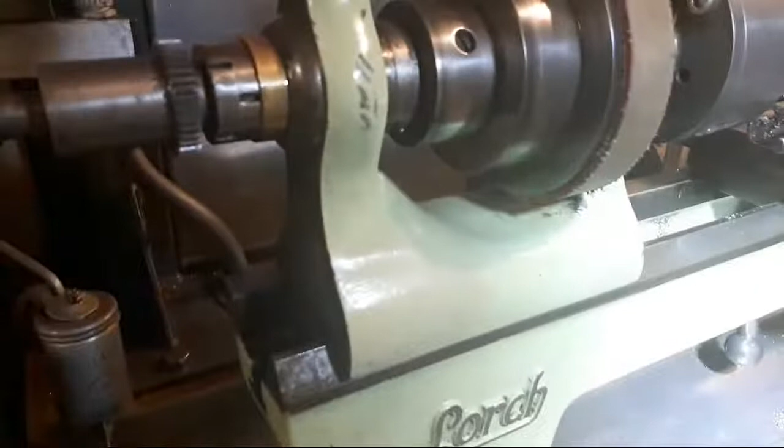Now I need to spend some time. Hey Alistair. I could make a threaded fixed tumbler, and I do need to, because I need to make a drill bush to locate the center of it, to drill for the pin for the detent. So I might have to do that, but it is an odd thread and I don't think I've got a die either, so, and at this point I haven't got thread cutting attachment.

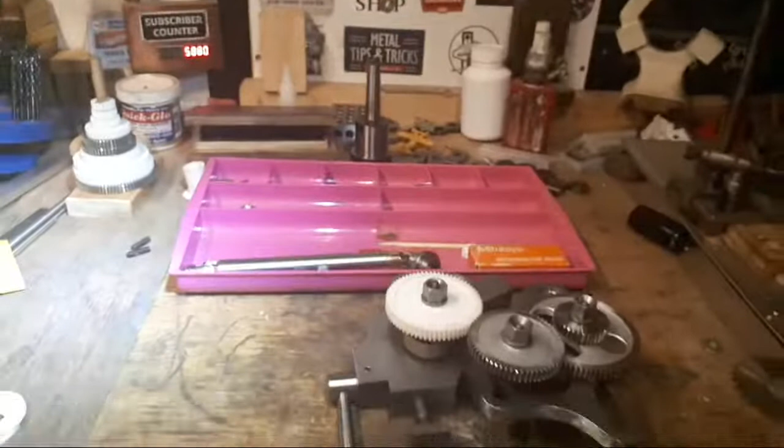Let's move past all this junk, and it is junk. Hotshot 360 oven there under that junk. It has been a little bit deceiving, has been used in the last 48 hours, but I've packed stuff back up on top of it so we can get the cone of cleanliness for the video. I need to spend some time on this gantry here at some point. G'day, Abe, good to see you.

I don't know, I'm waiting for inserts from China, but that's another story. And they haven't arrived, and they've been coming a lot longer than that, so it shouldn't be far away. You might have it by the end of the week, Rustnox, I hope. I really would like to see that.

Got to fix this gantry. We've got some, this is all 3D printed and it hasn't lasted, so some aluminium parts would be good. At the moment it's pretty rocky, it's getting worse gradually. So new bits, this is it. Quite a job.

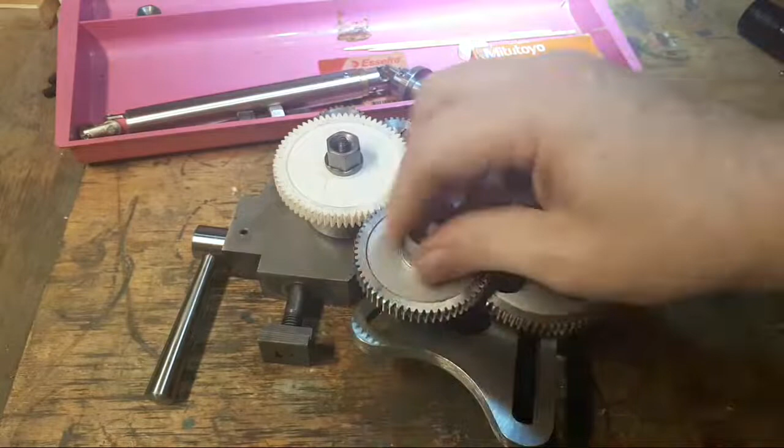These are only finger tight, and that's all they need to be. I'm really pleased with this design. I'm kind of wishing that I'd put...

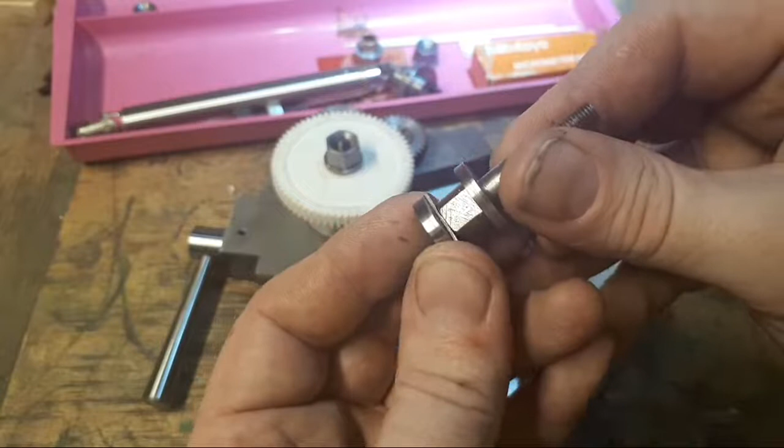These have T-nuts on here so they don't turn when you do them up, and this one has a T-nut on there so it doesn't spin, and they pinch by about 1 millimeter there, something like that. So this is a really good system. I wish I'd put hand nuts on these.

And this all runs on a bronze bush. And these done up. There's a lot of work in these nuts, Craig. I'm not sure I want to make some more, but we'll see how we go with that. Might happen one day. A couple of nice 25mm thumb wheels would have been really good for it.

Probably, Craig, I've got a dividing head so I can cut all these. The plastic ones will be all right for a bit, but I can either cut them or I can buy them and trim them down. I haven't decided which one yet.

So this one here, this is too long, this thread. I'm going to shorten this up. I think it's a pain in the...

So this one runs the same speed as the spindle, and then the gears are from there through here.

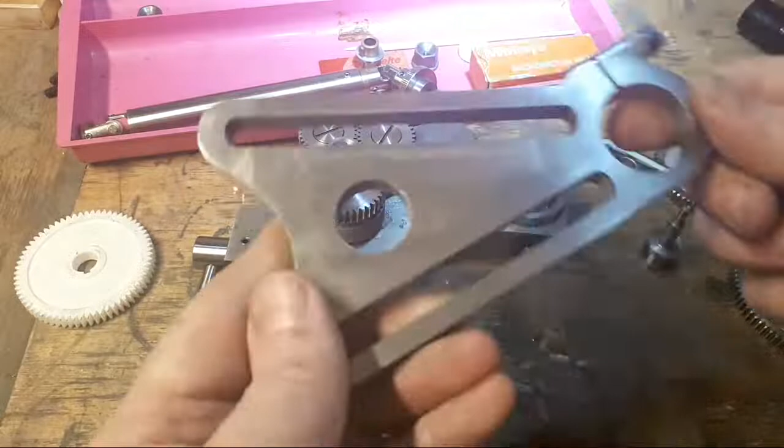I don't like this bolt much. That's the banjo. I'm really quite pleased with that. This is going to get a proper lever bolt, I think. I was thinking I might buy one, but they're all too big in the body and a bit ugly. You can buy a plastic one, and if I'd made plastic ones for all the others, I probably should have done that. But I'm probably going to make a bolt and then machine a washer so it locks in the right spot. I think that's the idea.

So, hey Ted. You're probably right, you're probably right, Stephen, but I think that it's going to be fine. Hey Fridge. G'day Scott.

So that's one project to do. This here, if we have a look, has a bush in here with a bronze bush in it. This is recessed so that this piece, which is going to look something like this, I think, with a key in it, sticking out here, sits down inside there and doesn't collect too much dirt and dust ingress. That's the theory there.

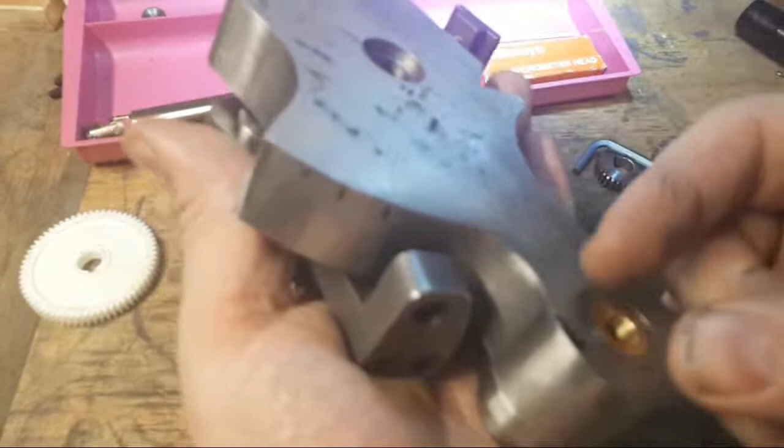And it goes through here, and I'm just going to put a shaft collar on here, a good one, and a grub screw or a side screw to do it up, and that'll do to lock the sideways end. The end ways, I guess end shake you'd call it.

There's still things to do here to connect it to the universal. Still got to think about that. This is in here just with a grub screw in the bottom, 8mm grub screw, which I think is going to be good enough.

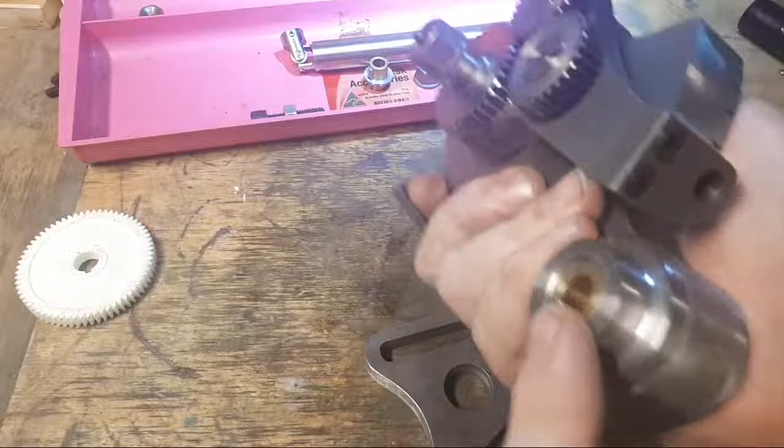And I need to make this lubricatable because it's not. I need to make it so I can oil it because it's a bronze bush. So I don't know whether I put, just looking at it, it might be best to drill this and put like a nice 6mm oil nipple in the top here and put a groove through the bush to lubricate it. That might be the nice way to do it.

I'm not even sure it needs a groove. I'm sure the oil gun will push it side to side in my sort of fits, the sort of fits that I make. So that's probably going to be the easy way to do it. You just oil that rather than put an oil hole here and locate this positively. I'm probably going to just drill this and put an oil nipple in the side, and that way it's easy and easy to fix.

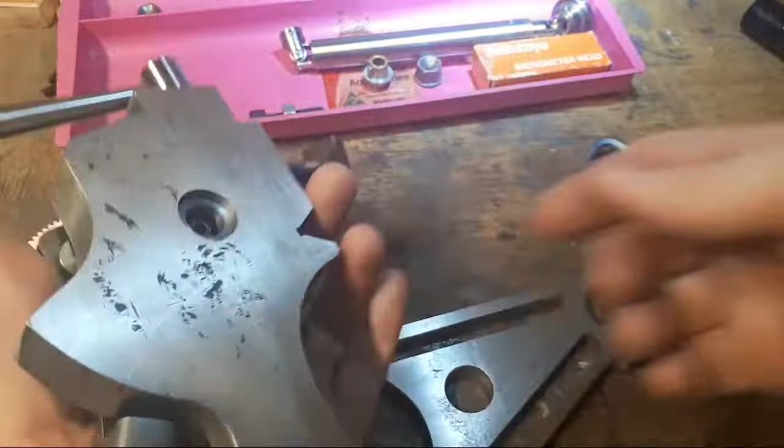Yeah, the helicopter's back. If anyone's PTSD kicks in, yeah, sorry.

This hasn't cleaned up particularly well on the back, probably because it's been sitting around in a puddle somewhere. I might have a bit more of a go at it and see if I can clean this up. I could send it to get ground - I've got someone who offered to do that, but it doesn't need to be that good on that side. This side has cleaned up pretty good.

Hey JB, miss all the good bits.

So that's where we're at with this. It's the state of play. There's a lot of bits in it and it's coming together pretty good.

Like the Battle of Britain - yeah, they're out looking for someone, I think. It's either a police helicopter or it's a search and rescue helicopter, I reckon. They're fairly low and they've been going backwards and forwards for a little while.

So I've got drive right to this shaft, which is the PTO shaft through to the compound, Craig says. Making this shaft is fairly simple when I've got some carbide to cut it out of some decent shaft. That's going to have a piece sticking out of it that looks something like this, only in steel, with a nut on the top, like so. And that should clamp those two down on there and drive from the banjo right through. So that's the theory.

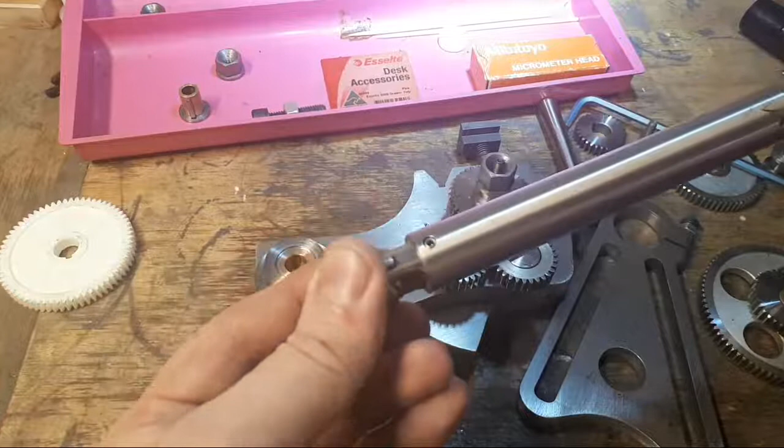89 Magna, eh? Awesome. The only one, the last one I saw was at the Motor Museum in South Australia. What an incredible car. There's a reason there's not many of them around. Anyway, they weren't perfect from the factory, Craig, sorry.

Yeah, it doesn't need to be phased. It's not far out there now. I don't think it's going to be too bad. If it's a problem, I'll move one of them. But at this point, I think it's going to be okay.

Terrible car, sorry. Gosh. From the man, yeah, probably. Anyway.

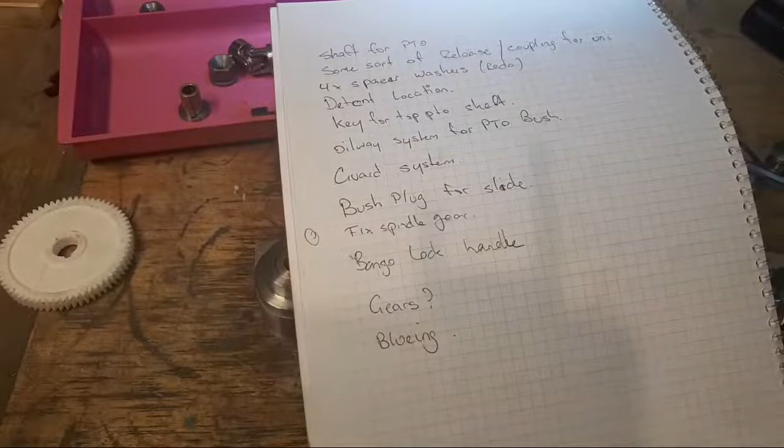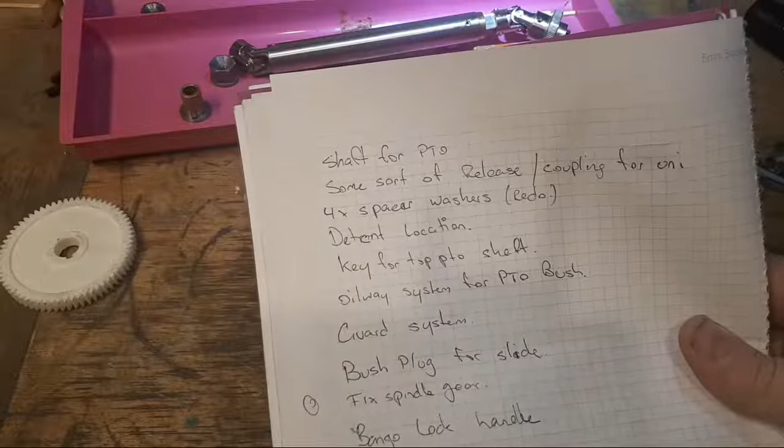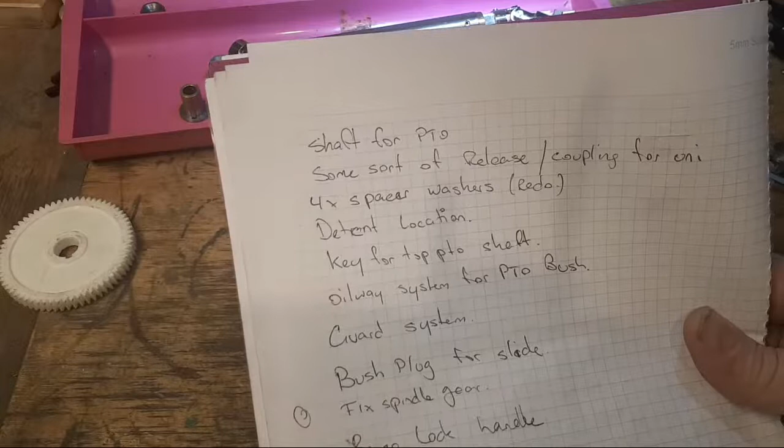No one likes Mitsubishi Magnas. Mitsubishi Magna was Australia's first Mitsubishi car after Chrysler got out. I guess someone else will know the history better than me - probably Craig - but it was a pretty terrible sedan. Either love them or hate them, and obviously Craig loves them, and we won't judge him for that much. Anyway. Upgrade of the Sigma, I guess. Yeah, I don't know if it was even that good. The Sigma had high and low range, so it was really only a farm tractor anyway.

I've got to make a shaft for the PTO, which goes through this hole here. I've still got to make some spacer washers because when I put these on and started using them, I discovered that they're a lot thinner on one side than the other. I don't know if you can see that, but it's really not particularly good. You can see that, I reckon. So I'm going to make them and harden them up and get a friend to grind them flat. So that's where I'm at.

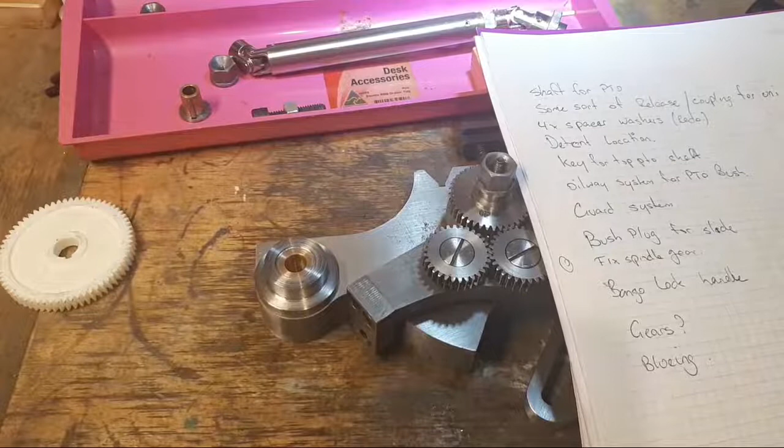I've got to organise this detent location here. So basically I've got to make a bush and center punch these and drill them, or make a drill guide - a bush with a hole so that I can drill them through this rod and get it somewhere near in the right direction, in the right spots. I've got to put an oil hole in here, and I've got to make a key to go in the end of the bush.

What else? I've got to fix the spindle gear because I had to move it, since this is a different thickness than what the original drawing was when I started. So I've got to put a spacer or a scotch key or something in there. I've got to make a lock handle for here.

This cap screw's a bit of a pain because it's just going to fill up with swarf, and you're going to have to be digging it out with a magnet and a scriber every time you want to use it. I don't like them much anyway - it doesn't look good on this machine, so I'm probably going to put a handle on that. Going to make the rest of these gears, finish this off, and blue the body.

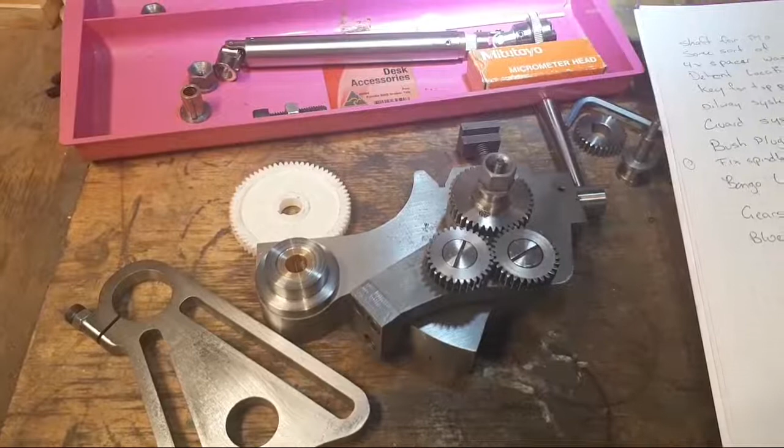So I've also got to make some - I've got to fix the compound. Now we're going back over the lathe. Sorry guys, if we can do it without derailing this stupid thing.

I came home tonight and cleaned up. Sort of. Wasn't a particularly huge effort, but I did sort of sweep the lathe down.

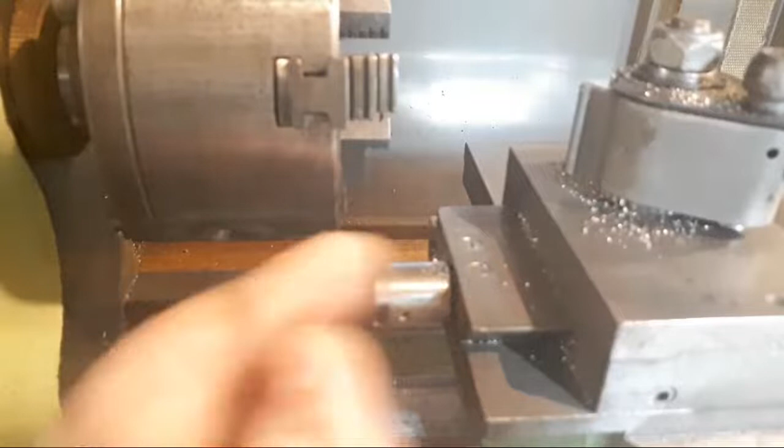You've probably all seen this and you know how it all pops together. I want to make this so that you take this screw out and put a plain plug in here on the end of the shaft to support it, to keep the dust out basically. It probably doesn't need to be anything special because there's no actual loading on that as such when it's just got a pin in it, because the loading's all between - I think the loading's probably between this end, which has needle rollers in it, or thrust bearings, angular contact ball bearings I think, and this nut.

You do, however, lose 3/4 of an inch or something on the end here, which I don't like very much. You lose more than that because this will only come up to there, whereas this at the moment will come 1/4 of an inch past. So I don't like that much. But if it happens, we might need to make something on here eventually with the drive out further here.

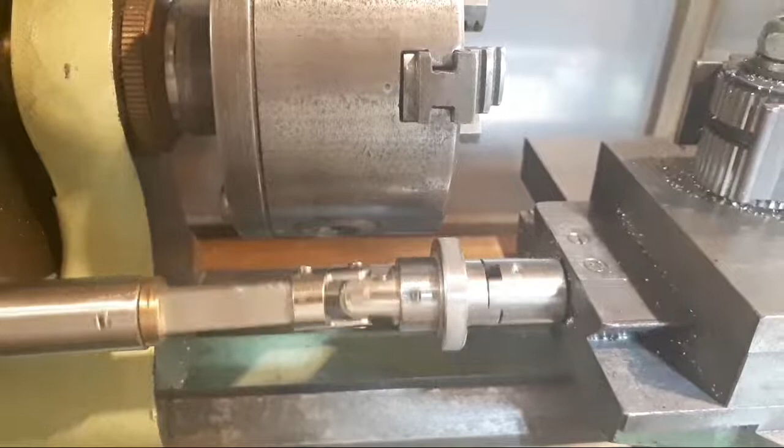Also want to put - now, because of the way this works, it's got a dog clutch here. I haven't really had much to do except think about this for a while. But when you pop this out, it's got 2 grooves in that pin, see? And this one's got a spring detent ball. So when that's in, that's not going to move anywhere, and when we turn it, it all turns like that. When this pops off like that, this freewheels.

Is everybody happy, as Mr. Pete says? Does that make sense? So that's how that works.

Now it's a very simple job to put some sort of a lever on this side, on here. If anyone can actually see that, I'm going to try and move this carefully. There. Try and put some sort of an adjustable micrometer rod that goes on here, a square rod with a nut on it or something, I'm not sure yet, to kick this off when it gets to the end of the stroke and kick the power feed out if you need it.

Craig, I'm sorry. I feel bad now.

So is it ball and socket? It's got a spring and a ball in there, like a proper screw-in detent. It's all one piece. So when that pops out, this works without it. So it theoretically means that all this can stay in place all the time if it needs to.

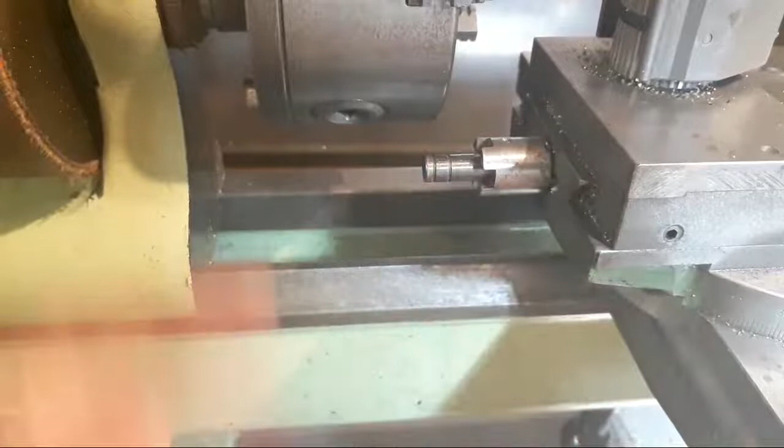However, if we want to take this off, say we want to use the 4-jaw chuck, or we've got a big job that we want to swing and get in close to the chuck with, we're going to take this out, which is a matter of removing this pin, and then there's a screw down into the end and a cross pin on the lead screw.

So we need to be able to take that out, and I'm going to make another piece to go in there with a screw on the end of it. It's just to blank that off to keep the dirt out of it, and that'll give us a fair bit more difference. So for that end, that's cool.

Now for this end, right, this goes up here on the shaft.

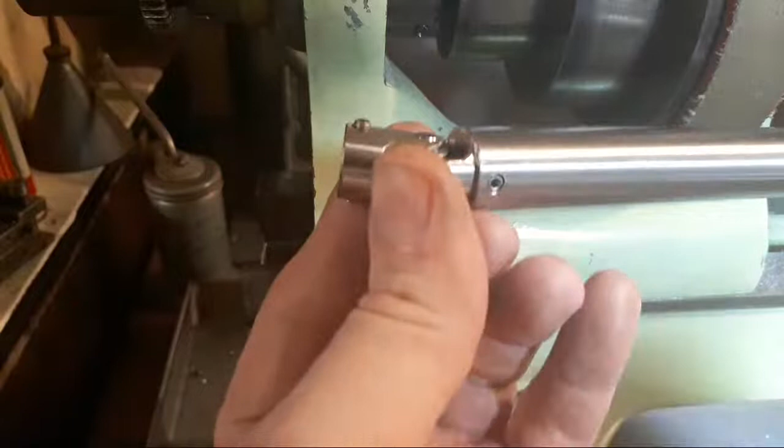Morris Minor, hey? Golden age of cardboard interior and clip-on tail light lenses. It's crazy because the roof always leaked and the glove box always sagged. But the lights didn't fill up with water because they would just clip on and they rattled. Anyway, my first car was an Austin 1800 Ute, so I know a little bit about that. But it's a long time ago. It's put me off cars forever.

Anyway, on this end, we could just have the shaft sticking out with the collar on it, which is the same diameter as that, and do up the 2 grub screws. But it's not a very positive lock.

Not at all really, not a big fan of it, because this can slip and you're going to get it out of sync when you're cutting threads and all that sort of stuff. So I don't like it. So we could make an adapter with a keyway.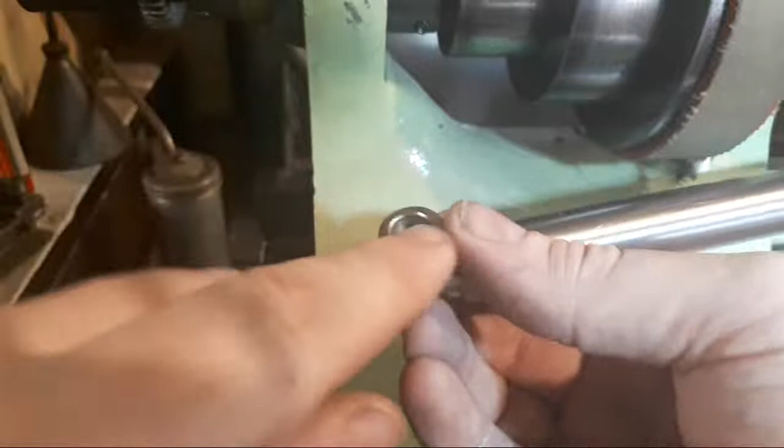Hey, Poppy. Joseph Lucas, Prince of Darkness. And then they got a bit later on and they put the plug hole of despair on the back of them. That was a bit interesting too.

It did, sorry. Anyway.

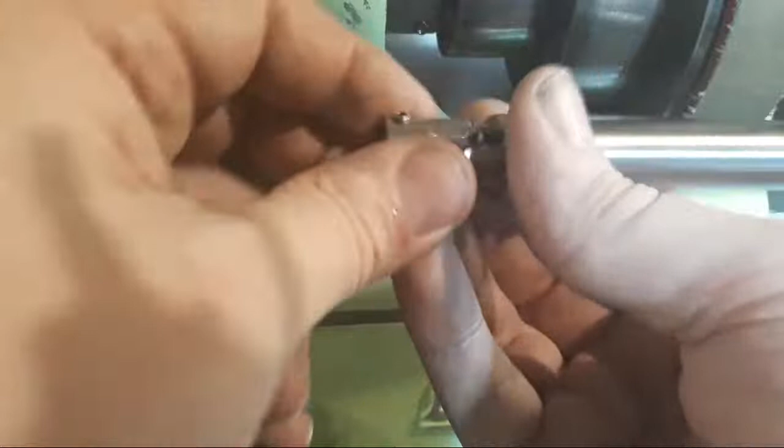I'm just getting started here. I need some way of making this positive, and also so that you can back a pin out or something like that. Maybe that's the answer, is just put a pin a little bit deeper that locates nice and positive, so that you can pull this off and put it back in the box.

G'day, making sense. Good to see you.

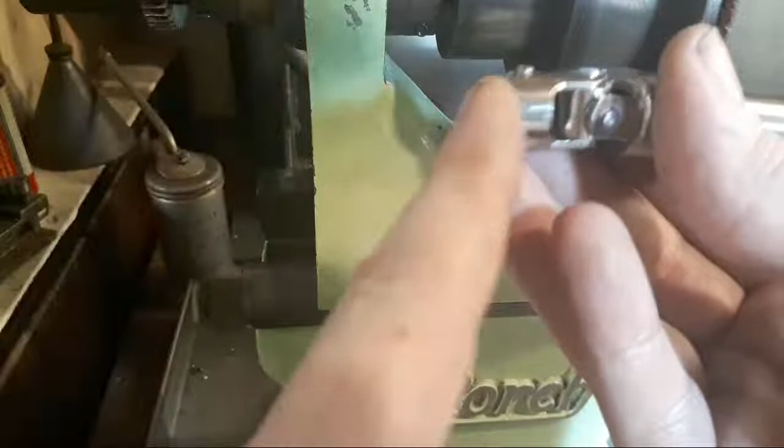So yeah, I want to take this off, but I want to put this back on in the same spot every time, and I don't want to be messing around with these 2 little 3-4 mil grub screws to locate it up and to chew up the end of the shaft when I take it off, and when I don't quite put it on in the right position again. So I need to make some sort of an adapter on this end to go.

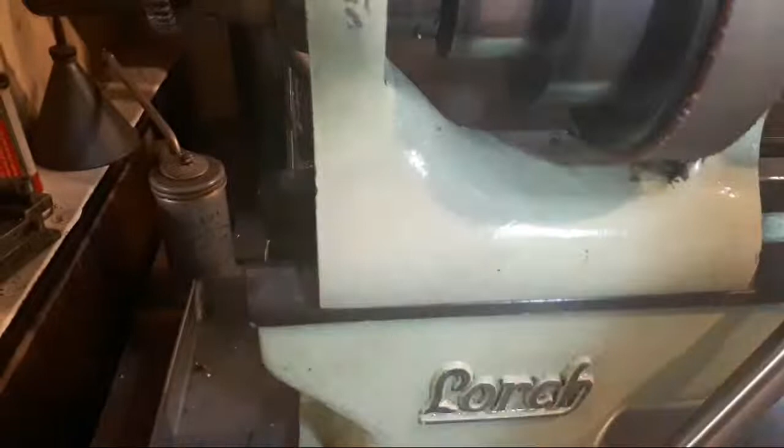Stephen. No, it's not a car chat. Sorry, Russ Knox. We're getting sidetracked, but everyone needs to be sidetracked this week.

So now, the pin could have a threaded head on it and just drill straight through, so that you push the pin in and then screw it in tight. That's probably going to work nicely, actually.

Single D shaft, like on a steering shaft. Raymond, I would like some more information on that.

Can you use one of those brackets at the built-in bearing assembly and then have a shaft off that?

I could, yes. The trouble is with that is that my lock dog clutches are only going to work one way, so I'm always going to get it the wrong way around. That's a fair point though. That's something to think about. That might actually work.

That's something I hadn't thought about.

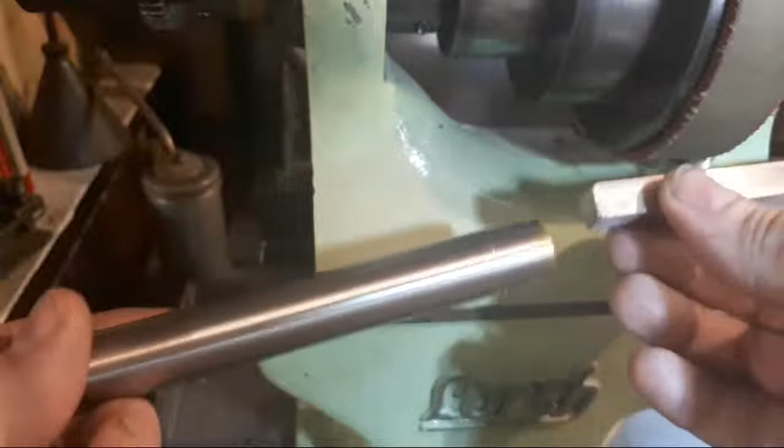I don't want to lose too much headspace here because I'm going to have to shorten this up anyway because at this point it's just a fraction long. I've already taken probably half an inch or an inch off it since I started putting it back together. But it could easily be, we could shorten the tube up a bit and we've got to take a little bit more off here.

And I want to put probably one of those spring detent balls in there that Stephen Lang got me so that you can click this together and take it apart, but it doesn't fall apart when you flip one end off and it lands on the dirt. That's the problem.

Rust and Ox, that's the correct and intelligent answer. It's a blue one, good colour. Any more knowledge than that's dangerous, and will probably get you a hard time here.

I don't know if this is a good idea or not, this square drive. At this point, it was the easiest and quickest way to make this, and it works. Hopefully it won't be too rattly.

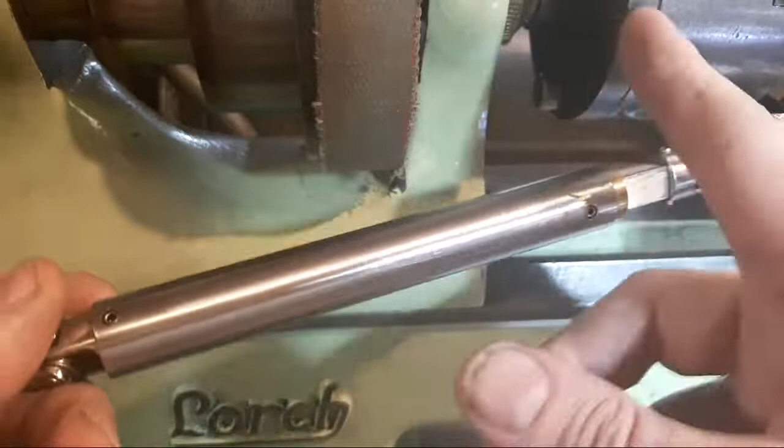The reason I haven't synchronized or phased these yet is because I believe this is going to be shortened - one of these will come off and be re-drilled back probably an inch. At this point I'd like to get this a little closer to the spindle, because if we're running collets, our work's back up here rather than out here, if that makes any sense, because when we put this 3-jaw chuck on, we're way out there, which is why you need an extension. But when it's in close, you want this tool right up here against the spindle, because that's where the end of the collet is. So to my mind, it still wants an inch off here. A spline would be better, and I'll see when this wears out.

This in and out of sync phasing thing, I really don't know about that, I don't know very much about it. Everyone seems to tell me something a little differently. These aren't quite lined up, so I don't think it's going to go whoop whoop whoop whoop whoop. But I don't really understand - I think they've got to be half a turn out. If these are lined up, this one here and the other end's lined up, and these are lined up, then what you're going to find is you're going to get some of this, I think.

Anyway, there we go. So I'm thinking I'm going to put probably a bar with a thread on it and a flat side with some measurements on it, and probably a calibrated nut that I can spin on here to move this piece in and out so that this pops off in the right position. That's the theory. Max had a really good idea about

So there's still a crap load of jobs to do, like there really is. It's nowhere near the end of the tunnel yet, unfortunately. Try not to knock this off here. Sorry about the mess, it's been a pretty productive weekend - I've made a few of these bits this weekend.

Yeah, the other thing that I want to think about now - this is kind of a bit of a death trap, to be honest. If we put this on here, and do that up, what, quarter of a turn or whatever it needs, right?

And put this back on here, with the biggest gear we've got, and then this nut on here, like such. That's nice and secure there like that. We've got these gears sticking out here in the way. Now you've got to put your hand around this way to get your finger caught in between them, but if you did, I imagine it may not end well. That's where I'm at with it.

I'd like to make some sort of a guard system for this. That's the theory. Now whether I put 2 pins in here and a guard that sits over the top with a cover on it that basically goes over the top with a nut on it - I don't like that very much because they always come loose.

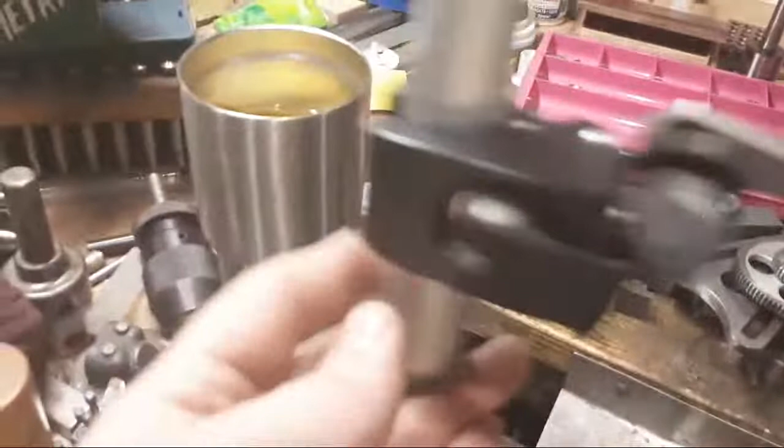So we've got basically a bike GoPro mount on a tube and a rod and a 3D printed camera phone mount. On my Thingiverse, if anyone wants it, this is the best part of the whole setup.

We've got aluminium tube up here, and we've got this crappy ball mount, which is only held in place by one grub screw. This moves backwards and forwards, but the 3D print here that holds it in place cracked. I don't know if you can see that. Let's try and focus it. Yeah, there we go. That's cracked, so that needs replacing.

This comes unscrewed anyway, so this whole piece needs replacing and screwing in the end of a tube with a decent adapter, and that would fix most of the problem here. That's where the camera issue is.

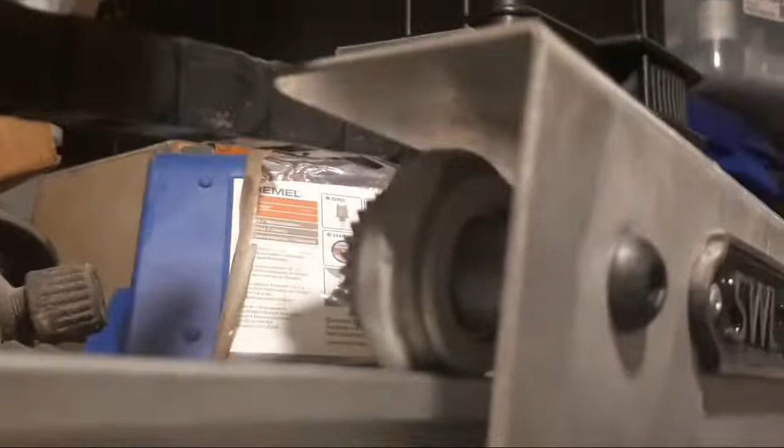Now these 3D printed wheels that run across this rail, got a lot of crap up here - this is storage area, sorry, this is a scroll saw, Pelican boxes, all sorts of stuff up here. Anyway, this wheel here has hit a rock or something and it's had the piece broken out of the side of it. These are no longer a press fit on the bearings.

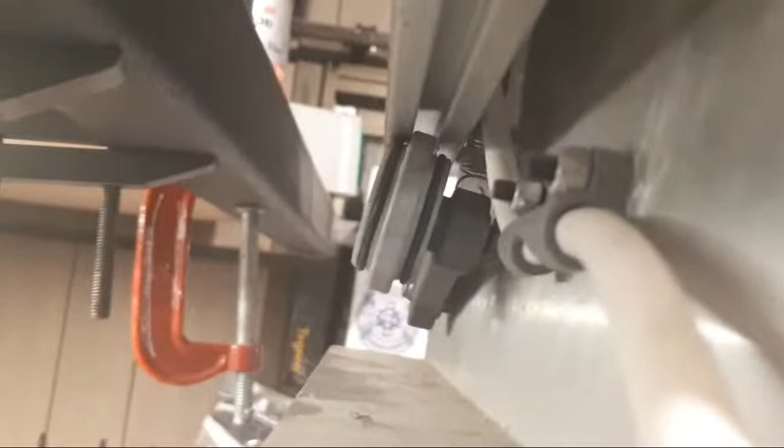So I'm going to have to make these wheels out of something decent or reprint them. This just has a spring-loaded arm in here to follow along the bottom one there, but that's no longer working on the bearings either. So at some point that needs fixing as well.

This bracket on the front, the 3D print, is probably pretty solid, and the light bracket's up there too. And of course we've got builder's plates on there because we can. So this is just a sheet of aluminium folded up to go over this piece of 80/20 rail. And this is the problem - when I fix all this here, which is a bit of an issue, needs some work as well. So there's probably a day's work making up bits for it and we'd be back in business. I need to do that at some point very soon.

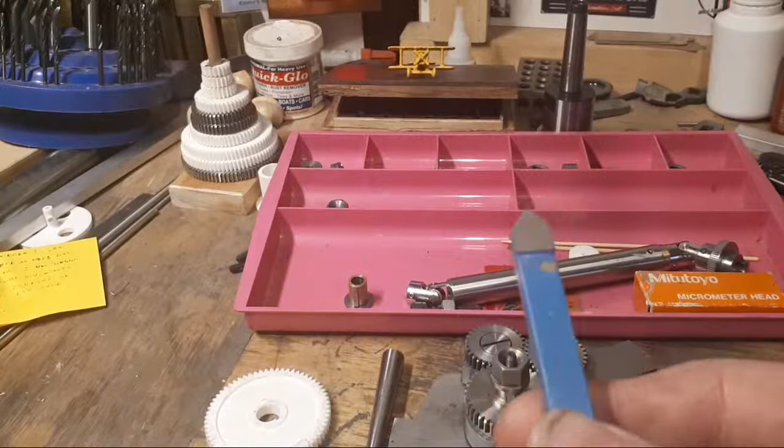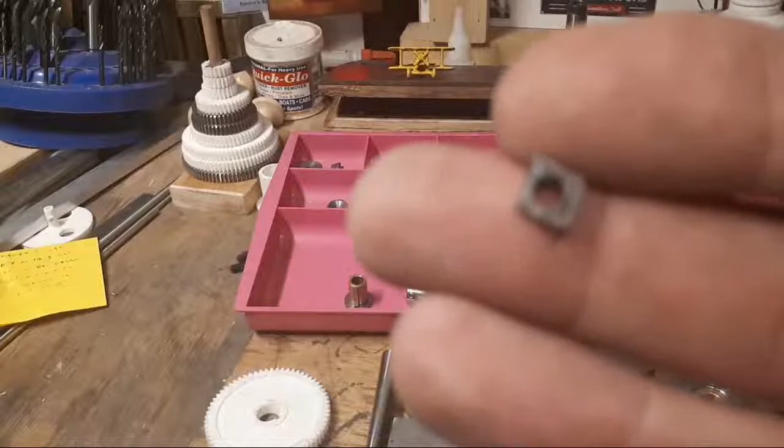Yeah, so we can't talk about that. What else? I'm waiting for inserts. I've got a set that Tinker sent, which are awesome, but they don't have chip breakers on them and no rake or anything, and I'm really not getting on particularly well with them at some point. I'm waiting on these, which is CCMT 6x2mm - they're the ones that I need. They've left China, and they might be here by the end of the week, I hope, or they might not. It might be another week, but it'll give me an excuse to make some other bits.

Dale's too much of a man, JB, for me to even imagine what that would be like, but just, yeah, go with it. See him in a cowboy hat and it's all over, Red Rover.

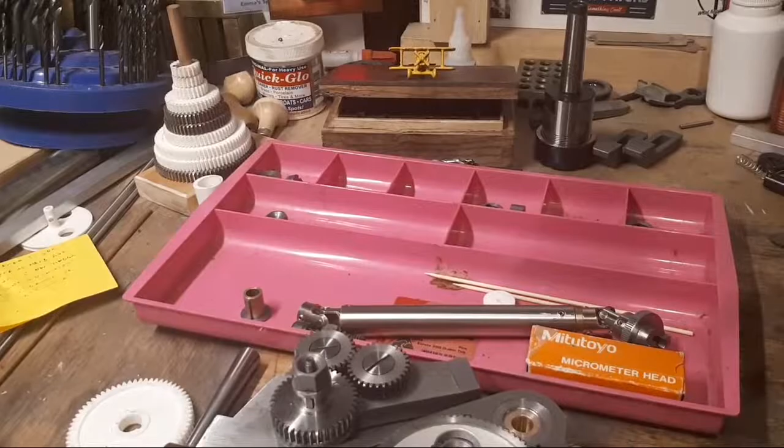What else? Mill hold downs - an update on those. I did run them through the tumble machine when I did these bits. So these look really amazing. There we go.

My friend who's got the bluing set up is in another suburb, and I'm not sure if I'm going to get to see him in the next 2 months, but I'll get some of these projects finished. We'll see how we go with that. There's hold downs to be made.

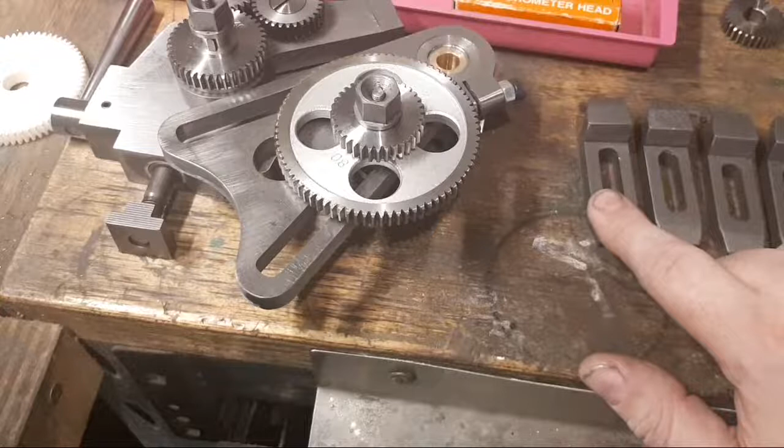I've got problems with milling machine arbors. It's in the milling machine, so I can't show you, but the 1-inch arbor needs some work. It's a Morse Taper 2 arbor with 1 inch, and I'd like to rebuild that, or get a Chinese one and modify it or something like that. That's on the cards of things I need to do as well.

Wow, up north, Dale, I haven't seen you for a bit, and you've got a video out today and I haven't watched it yet. I'm sorry about that. There's also one from Tom Lipton, but that's an hour, and tonight I'm going to fall asleep if I watch that. So that's not going to happen tonight, unfortunately. But yours might.

The impressive part of this whole statement from Dale, and I don't know if you realise this, is that when he casually says we have been travelling a lot this year, right now watching from my 4x4 van in Washington State, what this means is that Dale has completed rebuilding the 4x4 van and he has it on the road, actually travelling with it. So a huge round of applause for Dale, because that's awesome. That really is. Last time I saw it, I believe the motor was in the workshop, if it's the same 4x4 van. So, very impressed.